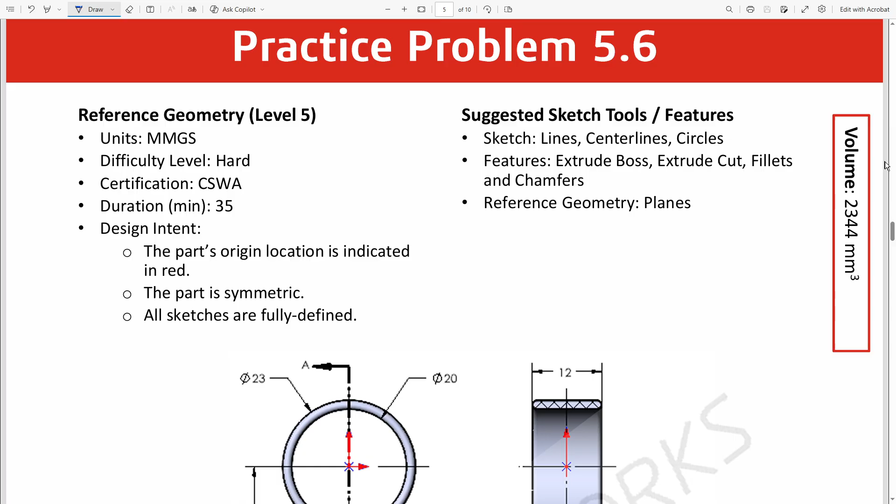Looking at this problem, this looks like the front face right here. So this is looking at the front face. I'm going to start with that, drawing these two circles with diameters 20 and 23.

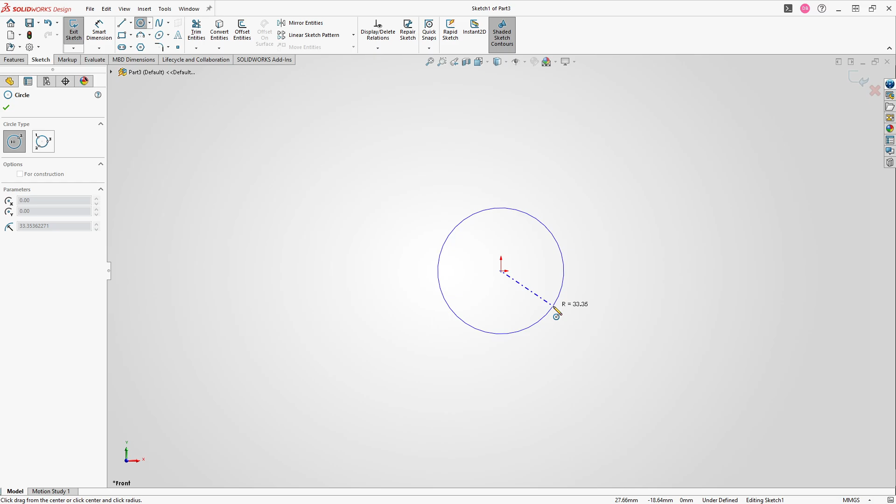So here's the front plane. Go into circle mode, and there are the two circles. The inner one is 20, and the outer one is 23.

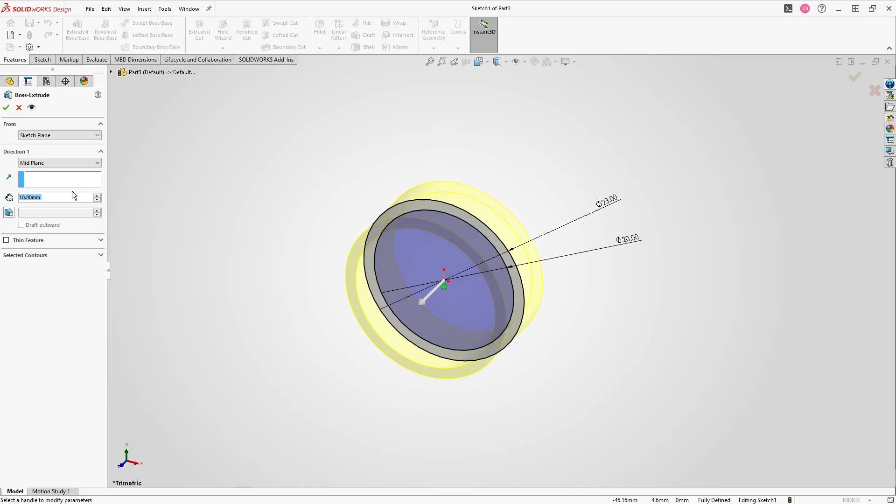And then we can go ahead and extrude. Looking at it, since this is going to be the origin, it's nice to have the solid symmetric about the origin, symmetric about the front plane in particular. So I'm going to use midplane, so it goes in both directions, and it looks like it was 12 millimeters.

Okay, so there we got the little circle part. Next, let's work on this body part, which looks like you can take a circle down here and extrude it up to this circle part that we just made. So that's what I'm going to do.

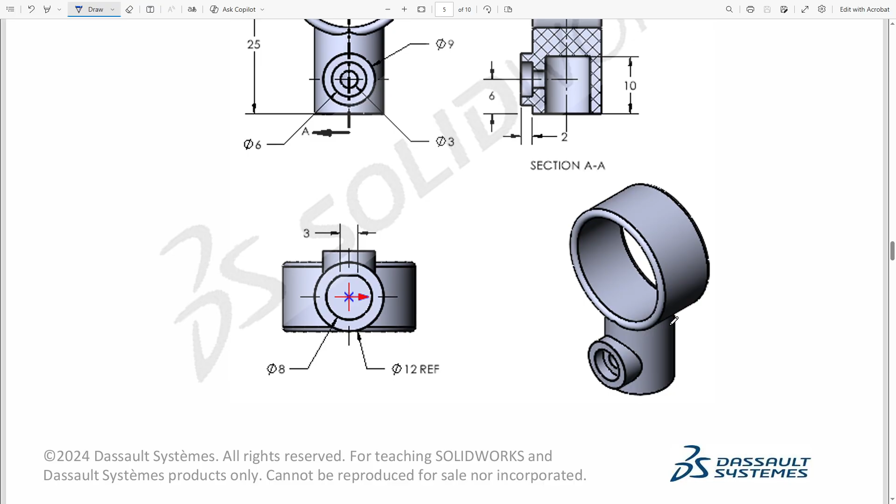To do that, we need to create a reference plane down here at the bottom, and it looks like that reference plane is going to be 25 from the origin going down. So let me go ahead and create that reference plane.

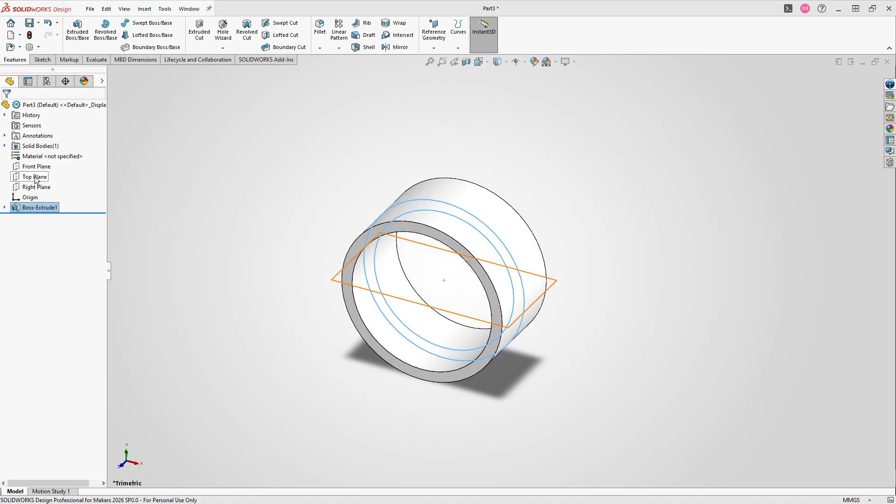Which plane? It looks like the top plane is going to give us something that we can then move down 25 to get the reference plane we need. So if I select the top plane and go to reference geometry plane, it's in the wrong direction, but that's okay, we can just flip the direction and go down 25.

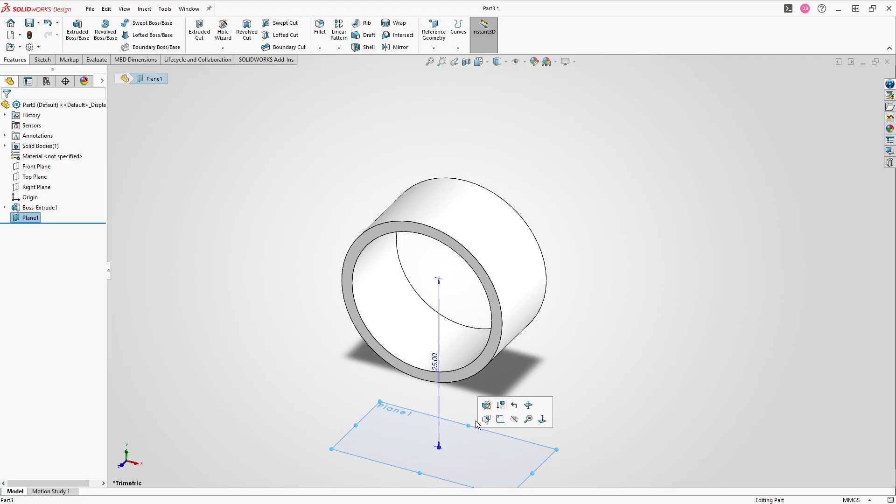Okay, so there's the reference plane. We can click on it, left click, and then click sketch. Go into circle, create our circle.

Which is going to have a diameter of, I have to look at it over here. Here we go, diameter of 12. That's the outer circle, and that's going to be the part that gets extruded up. We'll worry about cutting away these little inner parts in just a moment, but let's get the main body going here, the main base.

All right, so we're done with, oops, that didn't seem to make it. Oh, I think because I didn't know what it was. It's 12. There, okay, 12 diameter.

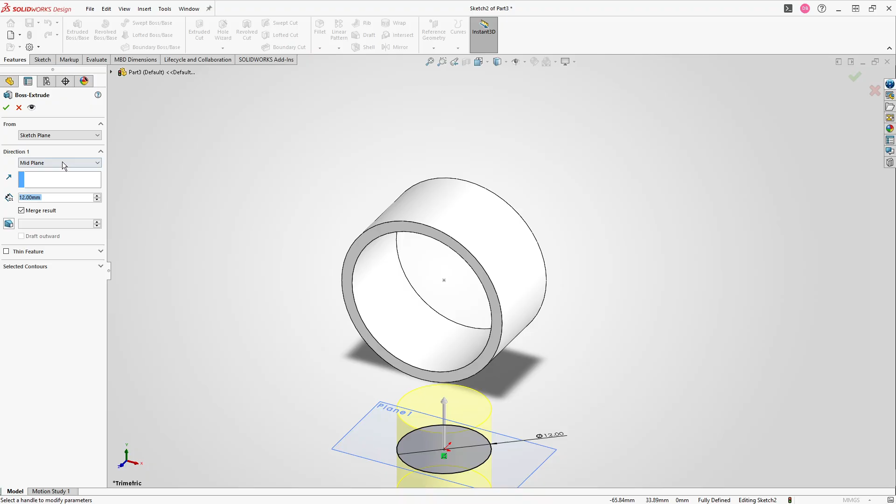So then we'll go to features, extrude, and what we want to do is extrude this face, or this sketch or contour, up to this surface here. But instead of doing up to surface and clicking on this surface, which would also work, we can just as well go to up to next, and that works as well in this case. It's a little bit simpler because then you don't even have to select that surface.

But sometimes you'll need to select the surface to stop at. You just have to make sure the direction is correct, that you're going in that direction, otherwise it goes off to infinity, but I think SolidWorks figures that out for you. Okay, so there's the main base.

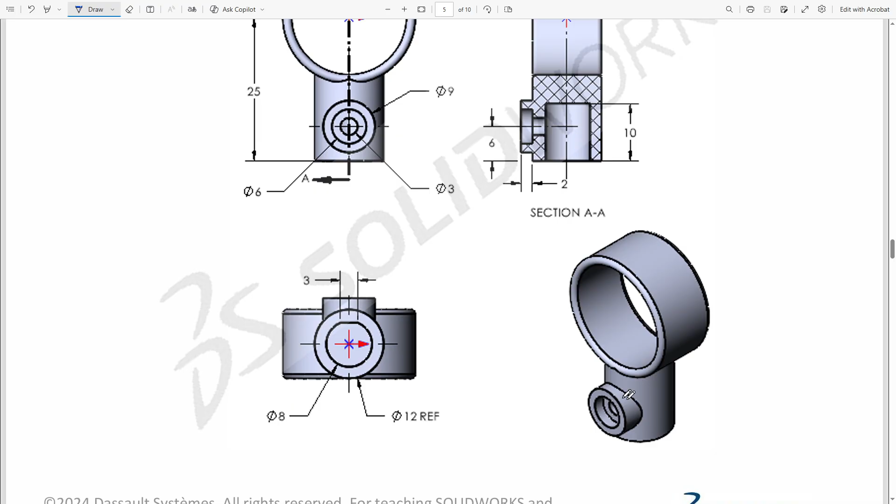Let's start getting this part right here. So first off, we'll have to create a plane to draw this circle in and extrude that up to this surface here, or up to next, as we're probably going to use.

And that plane, it looks like, is going to be from the origin. You're going to have to go out 6 to get out to this part, and then an extra 2 to go out to the end of this circle that's sticking out. So there's the 2 that we need to go.

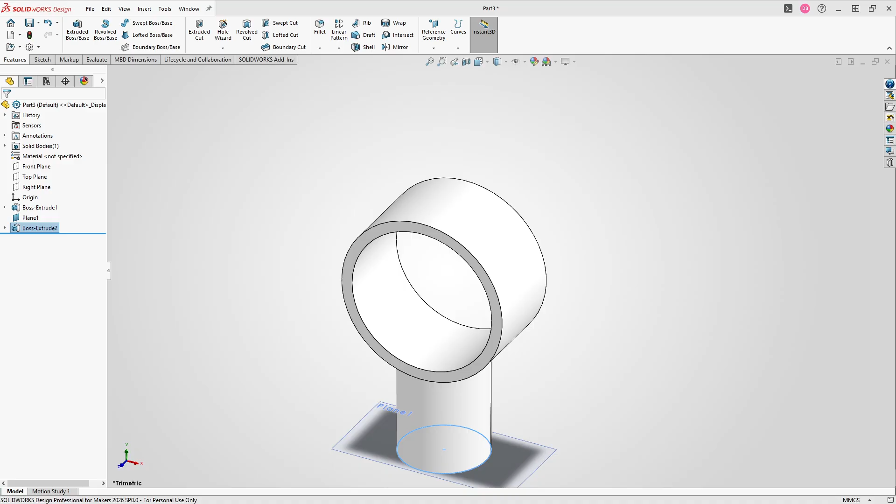Okay, and the plane is going to be parallel to the front plane, so we'll click on front plane, and we'll go out in this direction. We figured out it was going to be 6 plus 2, so that's 8. Definitely can do that in your head, but I just wanted to remind how we got that.

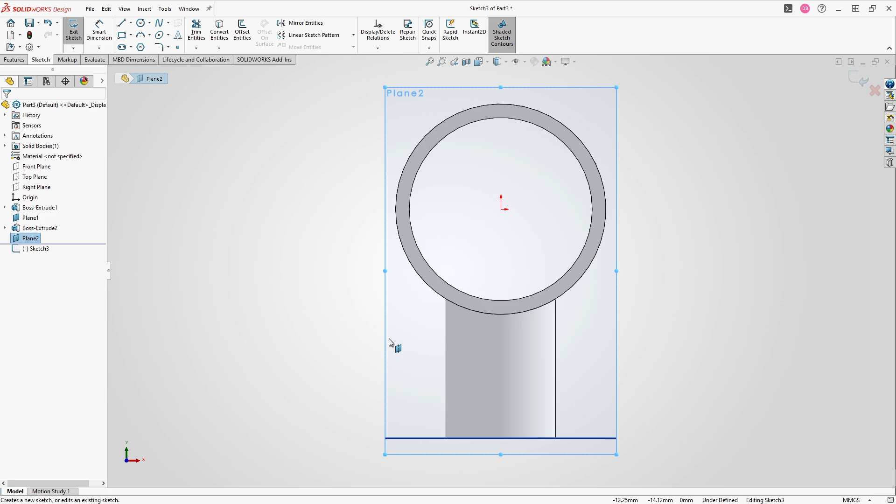All right, so then we can click on this plane, go into sketch. I'm going to create a center line to go down to the center of the circle. And actually I'm going to draw all 3 circles. See here we've got, looks like in this picture, this front view, we've got the inner circle, the middle circle, and then the outer circle with diameters 3, 6, and 9.

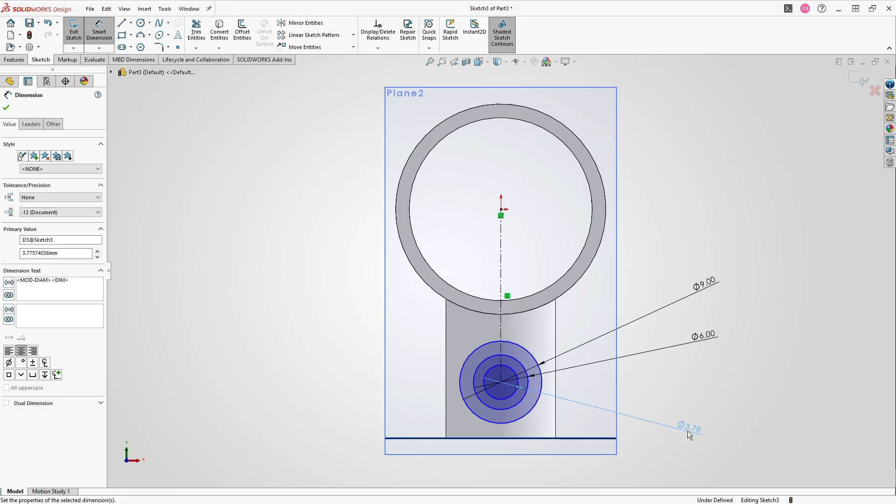So I'm going to draw all 3 of those at once just to get them out of the way. So here's the 3, the 6, and the 9. And I'll smart dimension them too. 9, 6, and 3. And actually one thing that we haven't done is figure out how far these are up or down.

It turns out it's not going to matter quite as much for the mass of this object, but we want to get this fully defined if possible. So looking back at our given parameters here, how far up is that? Okay, in this picture, from the center down to the bottom base here, it looks like it's 6. Okay, so that's going to be from here down to the very bottom is 6. Almost nailed it. All right, great.

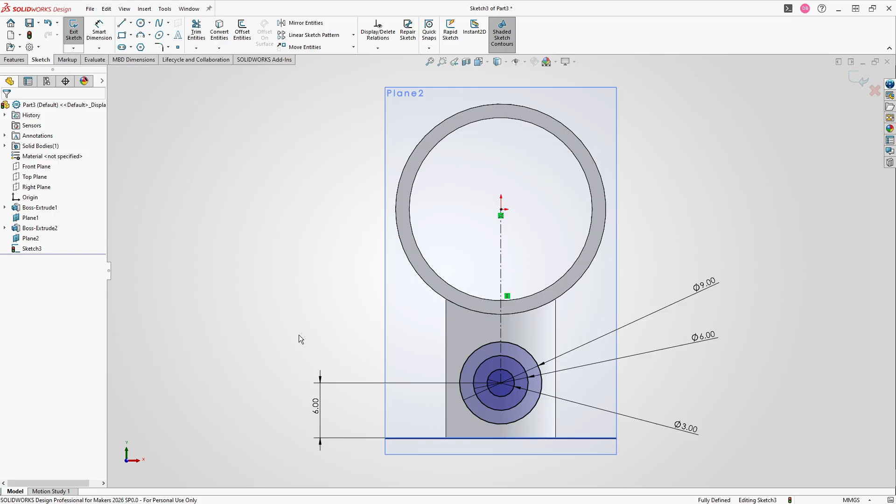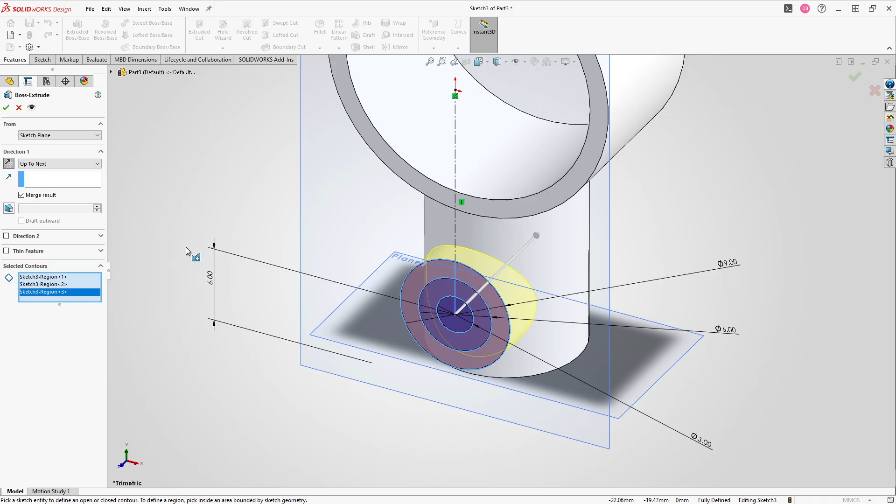Now we're fully defined, so those are in the right place. And now we're going to extrude. I'm just going to click all of them, so all 3 of these parts. We're going to go in the opposite direction, going this way towards this next surface, so just flush up against that surface. And you can see how it goes right up against that surface there. Okay, so hit enter, and now we've got all of that.

And then we'll do the cuts. Probably we can go ahead and cut these guys away. So you can see right here there's a little cylindrical cut that goes 2 deep. So let's go ahead and do that.

We have to go back in and select that sketch. So I'm going to select these 2 and cut. We don't need the whole sketch here, I'll delete that. And then go blind 2 millimeters. There we go, so that part is cut away.

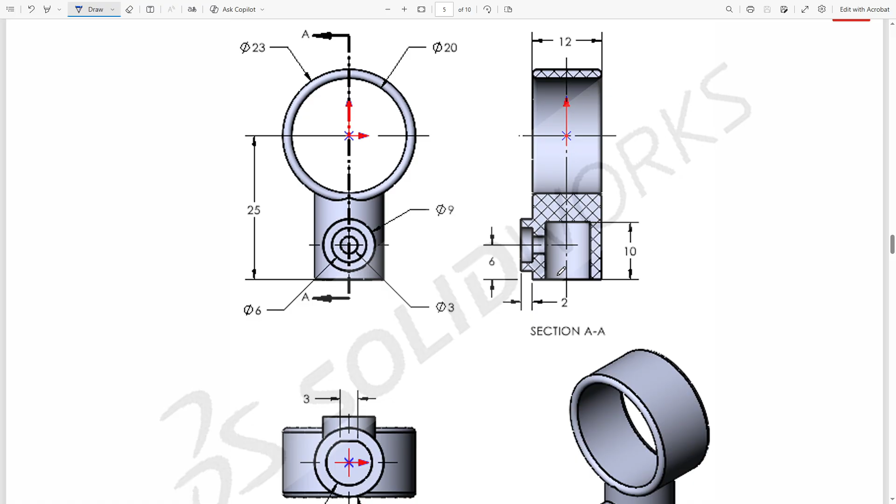And now, actually, I'm going to go ahead and cut this part out. So to do that, we need to have some kind of plane at the bottom here. And I think we already created a plane at the bottom, so we can go ahead and start editing in that plane. Where is it? Here we go. So I'll click on this plane, which is at the bottom, sketch.

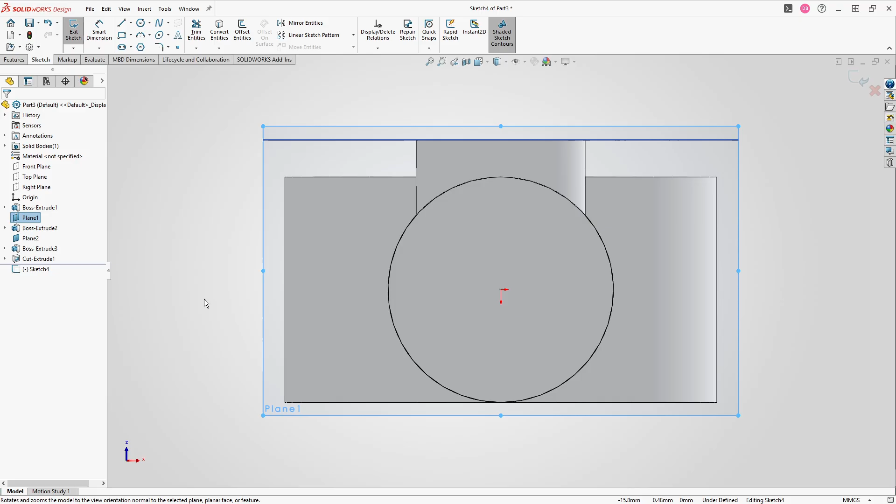And I don't really like drawing it from this point of view, so I'm going to click on the plane and do normal to again, which flips it to the other side of the plane. So I think if I click normal to, it just goes back and forth between one side of the plane and the other side. So that's pretty handy if you're just on the wrong side of the plane. All right, and this is actually looking a lot more like this view here.

So it's very handy. So now we're going to draw this part, which is not a circle, almost looks like a circle, but it has this little flat line right here. So the trick I'm going to use here is I'm going to draw the full circle and then draw the line, and then just trim away that part of the circle that we don't need.

All right, so draw a circle, draw a line, and we want this line to be horizontal with a length of 3, and the circle is going to have a diameter of, looks like 8. Fully defined again, which is always nice.

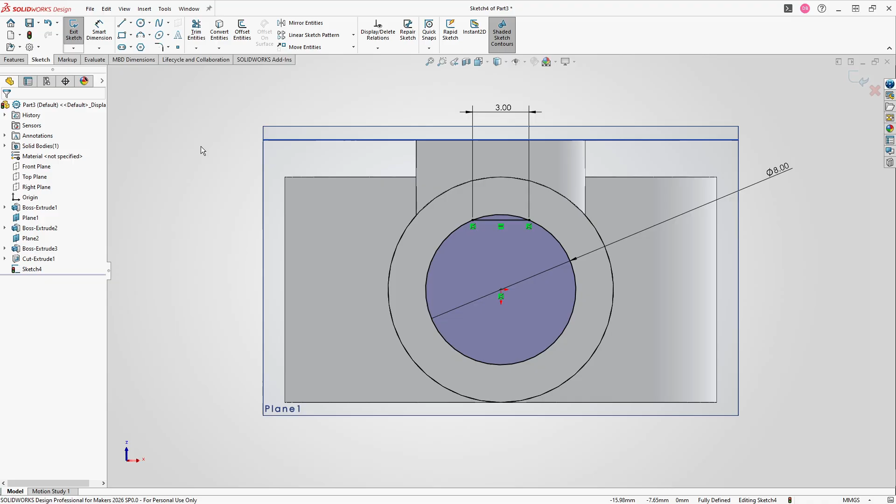And then I'm going to go ahead and trim away. Actually, before doing trim, I'm going to save. So I'm going to save this 5.6 video because I'm scared every time of trimming. I've had SolidWorks crash so many times when trimming that now I'm totally paranoid. So I'm going to trim just this part right here. Power trim this away. And now we've got that shape that we want.

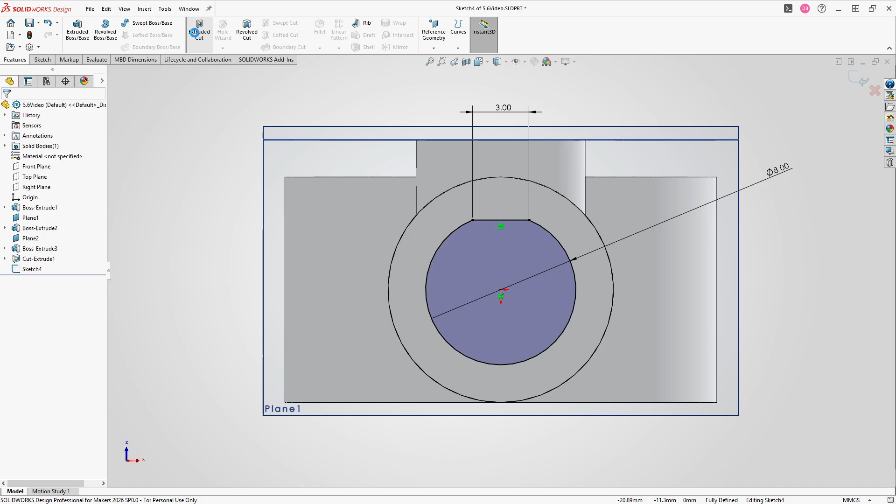So we're going to cut up. It looks like a distance of 10.

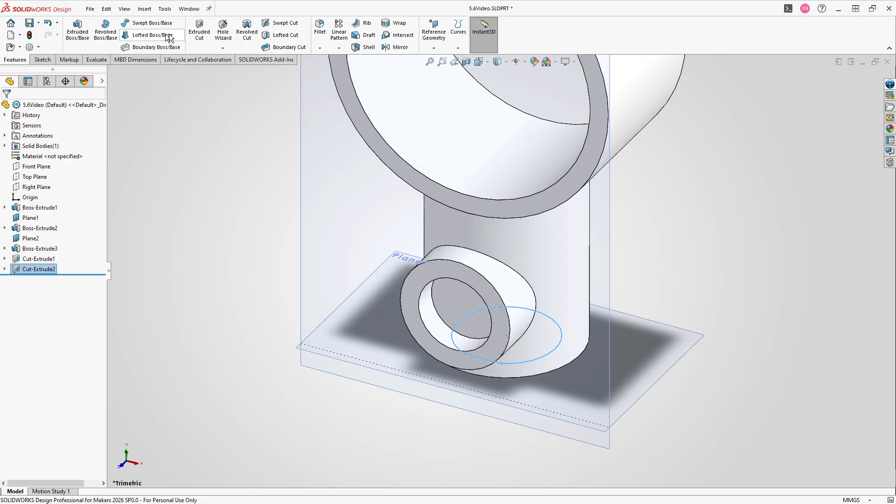All right, so one last thing that we have to do for cuts is to cut away that center hole, which is this part right here. You can see that that goes all the way through up to this open cavity right here. So that means we need to go back into sketch, which was it, sketch 3? That's the one that had all the circles.

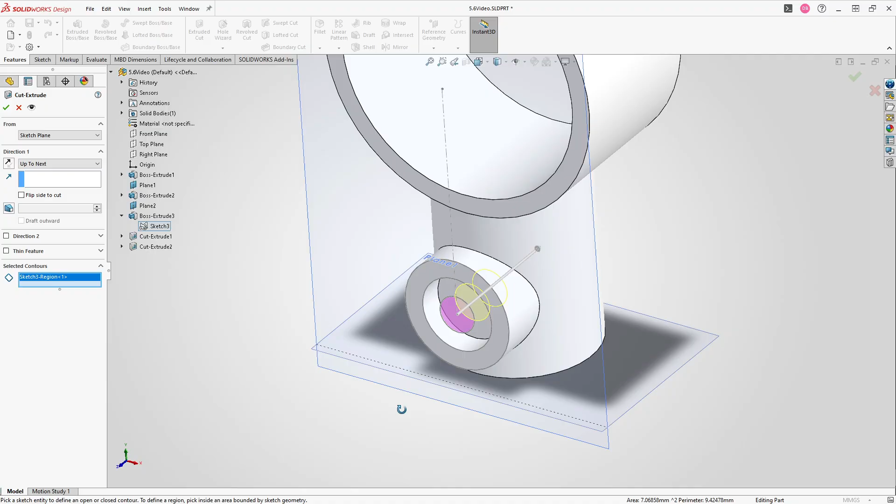Let me get rid of the whole contour and just select this one here. Okay, and what we'll do is, we'll go all the way up to next. So that'll go up to the next place that we have a surface, which is the inner part. See, it's this inner part right here. Actually matches perfectly.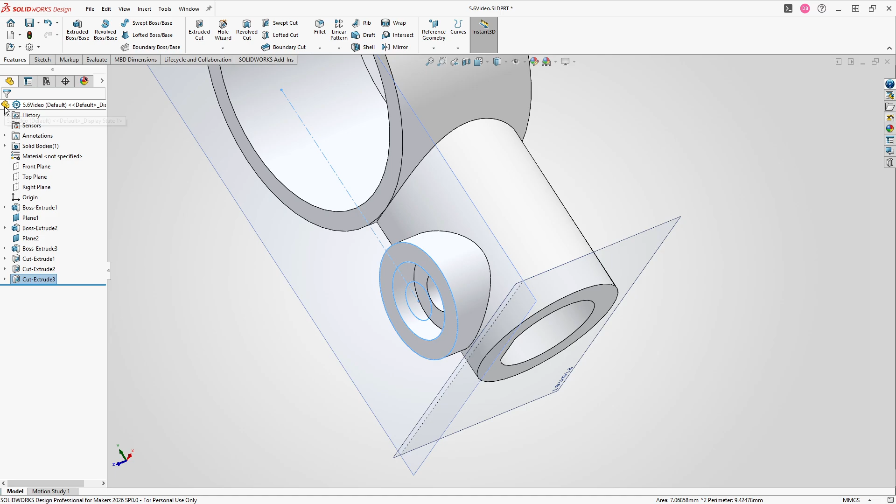Remember that this line was 3 and this diameter was 3 right here. Okay, so that's good. And let me just make sure it cut all the way through. Looks like it did. Oops. Yeah, it looks like it cut all the way through, so that's good. Hit Control 7 to get back into a nice isometric view.

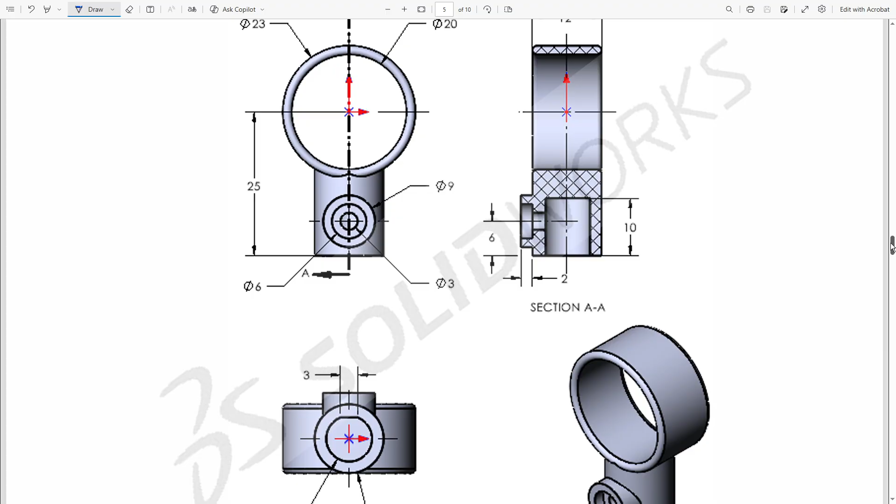Now, if at this point you thought that maybe you were done, it looks like we've done everything that we needed to do. But the only thing is right here, it looks like it's round. It looks like there was a fillet that was added right here and also on the back. If you actually look at this view, you can see there's a little roundness going on here and here.

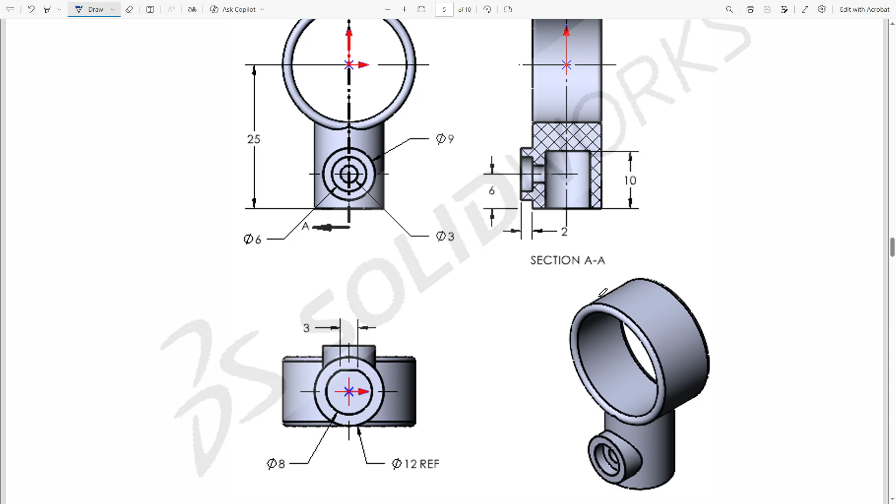So it didn't mention this in the instructions, but I figured, all right, the fillet has got to be perfectly going all the way around with no flat parts. So what we can do is calculate how much that fillet should be. What we can do is think, all right, from here to here, how far is it? And then we'll fillet half of it for the outer circle and half for the inner circle. Or just use that same value for the whole face, and then it'll fillet both of those two circles.

So this distance right here is going to be 23 minus 20, right? 23 is the diameter of the outer, 20 is the diameter of the inner. It's going to be 23 minus 20, but that'll be 2 of those distances, right? So we got to divide that by 2. So that gives you 1.5. So then basically we're going to take 1.5 and divide it by 2 to get the amount that we need to fillet on each of these circles here. So the fillet should be 0.75 millimeters. Just got to divide by 2 again.

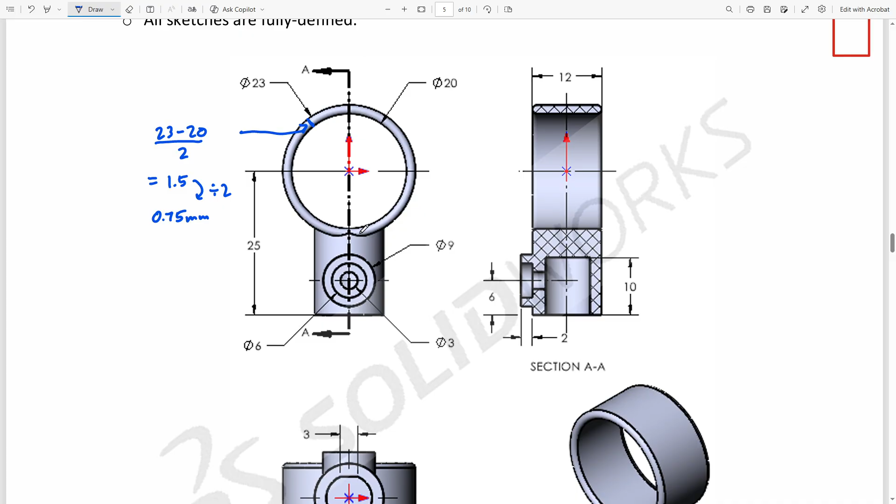All right, let's do that. We will select this. We'll do, where's fillet? Here it is. And we're going to do 0.75 on that one, and then also on the back one here. Hit enter. And there it's looking rounder now. And also this little weirdness down here we can also see in the picture. See this little kind of bump right here? That's caused by the fillet that we just inserted in there, or added.

Okay, so moment of truth. We can check our mass properties, and it looks like we're 2344, 2344, 2344. Perfect, 2344 cubic millimeters.